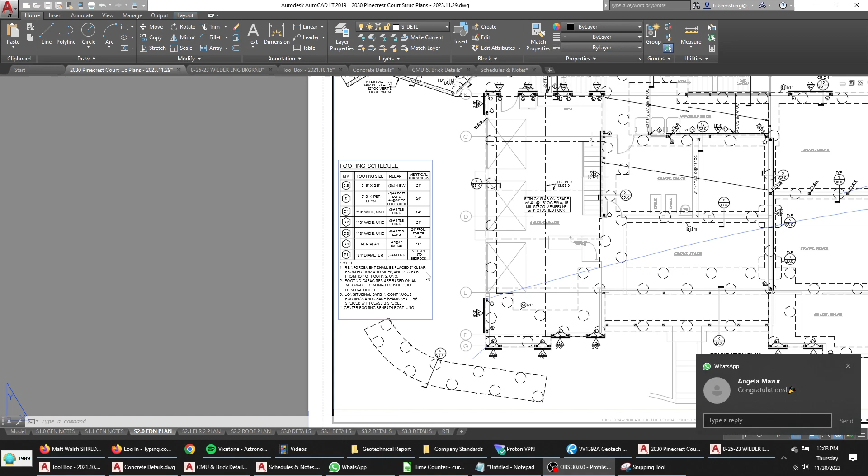Let's draw the footing step detail. Just a reminder, there is where the house footing is. It ends at this line. The retaining wall footing is over here in this area, and it's stepped down. It is stepped down to allow soil to sit on top so that plants can grow, like that.

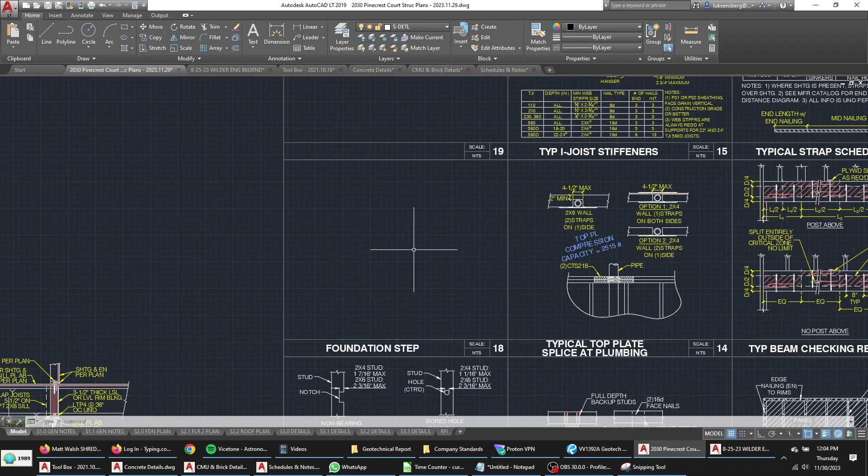So 18 on 3-1 was the detail. Let's see which way the detail's looking. Okay, it's going to have the house, the thicker house foundation on the left. Oh, I was going to see if there's a minimum thickness in the geotech report.

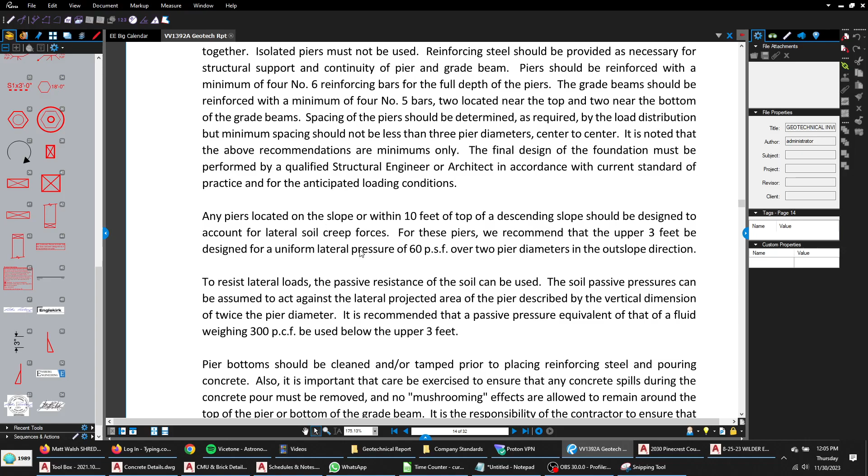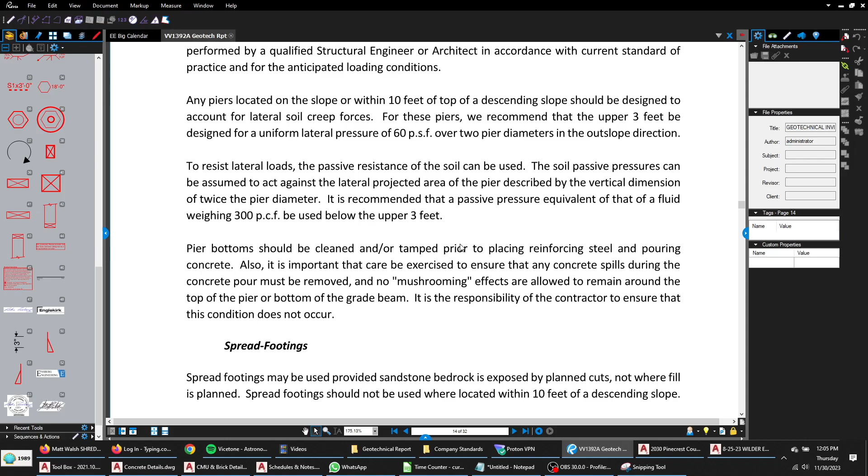Grade beams should be reinforced with blah, blah, blah. The final design of the foundation must be performed by a qualified structural engineer. Okay, that's me. I don't see a minimum thickness for the footings.

Then how big should the grade beams be? Well, they have to be at least as wide as the tops of the piers, and they have to be big enough that a cage of bars can be bent and fit inside of them. I think what's going to happen with this project is that I'm going to downsize these footings, these piers, to 18 inches.

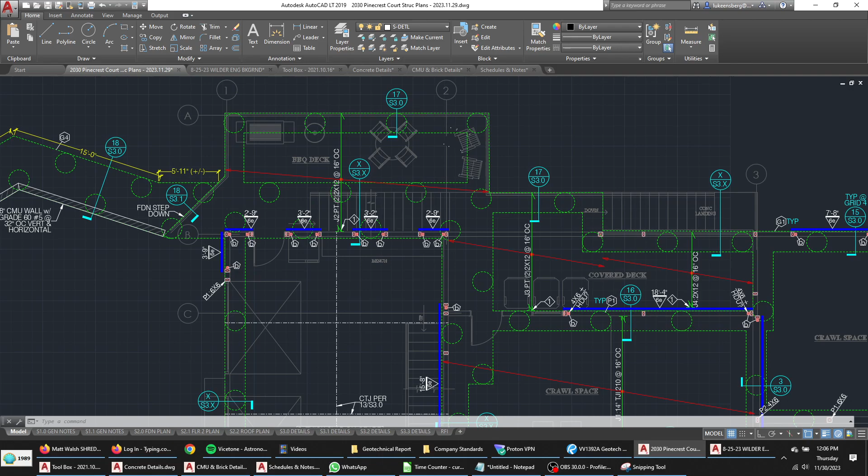Well, let's proceed with the detail for now. I'll have to do a foundation design. I may be getting a little bit ahead of myself, detailing this before I have a proper foundation design done. But let's go ahead with the CAD drawing example, even if I have to come back and adjust the detail. Whatever, the show must go on.

So, on the left side was the high foundation. My guess is that this is actually going to end up being 18 inches thick. So that means the high and the low foundation will be 18 inches thick. So we do like this. Sorry, slow down.

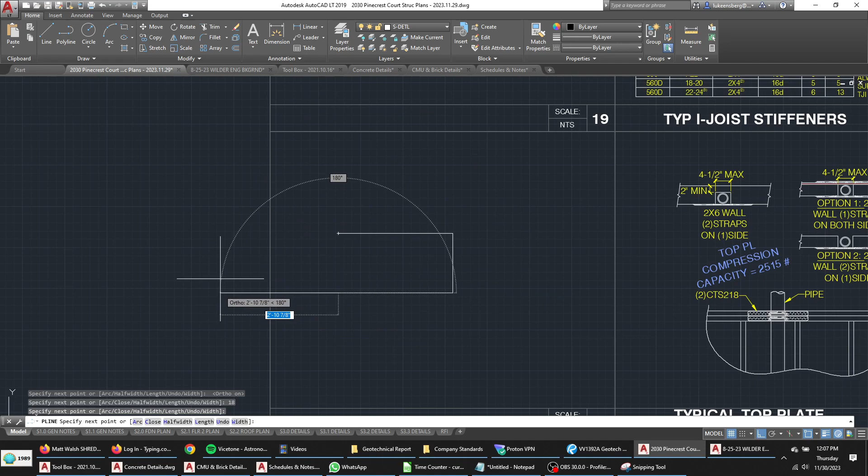PL for polyline. And I just start here, and I want right angle lines, so I tap F8 for ortho mode. Draw some arbitrary distance, click, and now I want to come down by the thickness of the footing, 18 inches. 18, enter. Right, so the program gave me an 18-inch long piece of line, and then I just come back some arbitrary distance like that. And now I'm done for now with that footing. So I just hit escape, and that lets the program know to not draw any more of the polyline.

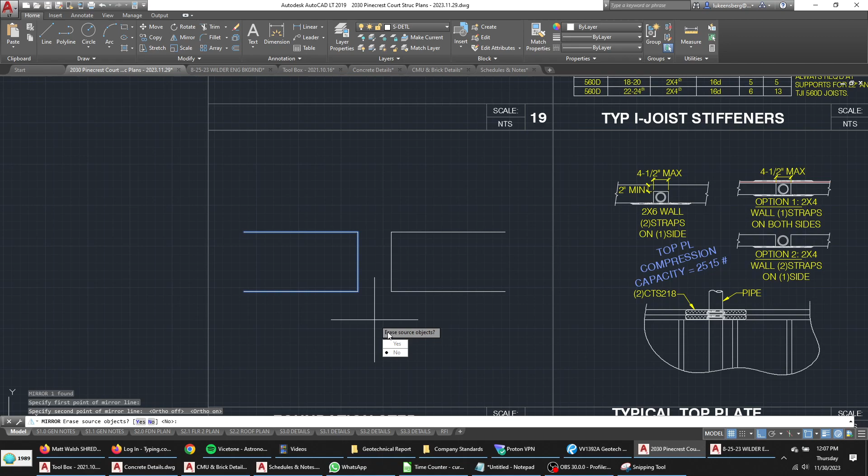Now the other footing that meets up with it is going to be similar, so I highlight this, I type MI for mirror, enter. I have to draw a line to mirror about. So I'll just draw like this, here and here. See the dashed line; if I turn off ortho, I can mirror about any line that I draw. But I'm going to use ortho, and I'll do it like this, click. And then erase source object, no, I don't want it to delete the original, so no, okay.

Now I've got the two footing edges, and we know that they butt up against each other, and I do want them to be connected. So, I also know from this detail that I'm leaving a 1'6" vertical distance from the top of the soil down to the top of the retaining wall footing.

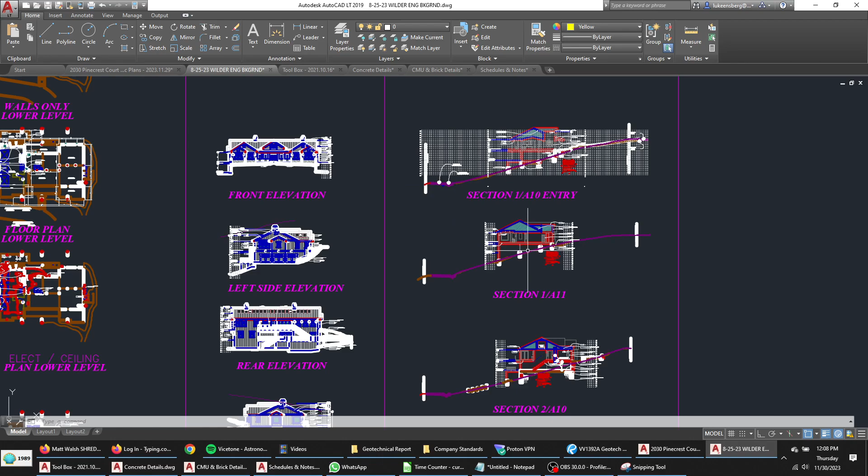And let's look at the house footing elevation by looking at the architectural plan. Look at a section through here, 2 on A10. That section is cutting through the house in about the same area that I'm querying. And what do I see? That's the deck. We're not talking about that. We're talking about this footing right here. This is the one that we're going to be connecting to our retaining wall footing.

And so I noticed that the bottom of this footing is... let's do this. I draw this like a rectangle representing this footing, right? And I draw a line right there. And where the line crosses the footing, that's where the grade line, this purple line, intersects the footing, okay?

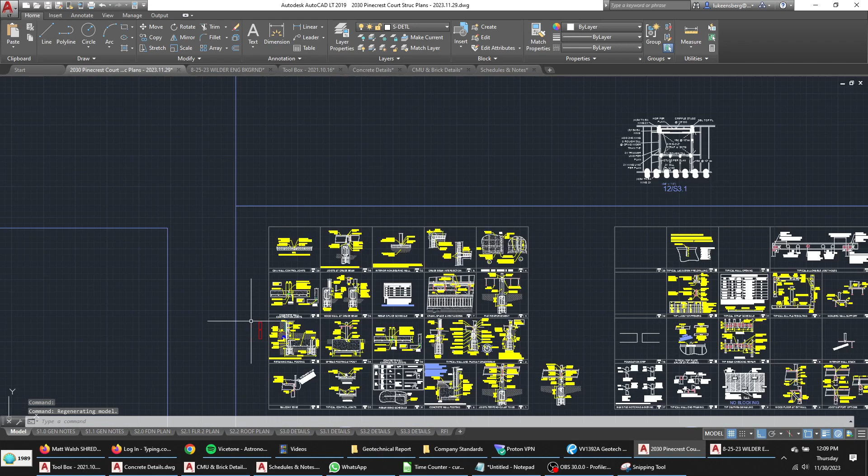So let's take this. I'm going to copy and paste this and take it over to my detail over here. I know this is kind of tricky to follow, but this is showing me the house footing. Did he draw that 24 inches thick? He did. Okay, that was his assumption. I'm the engineer, so maybe I don't agree the footing needs to be 24 inches thick.

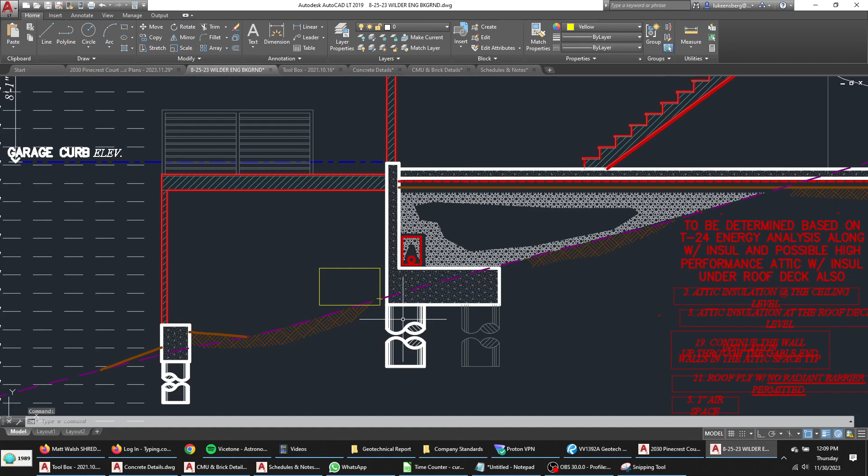So, oh, here we go. Here's the thing to do. So there's the grade level where it meets the house foundation. Let's explode this. I think the house foundation is actually going to be 18 inches thick. So what I did, sorry, I keep flying through stuff, I highlighted this rectangle and I typed X for explode. I hit enter and that blows the rectangle up into 4 separate lines.

I then highlight this, O for offset, 18 inches, right? And now I delete this. This is showing me where the grade line will be. Remember, it was right about this level relative to the bottom of my 18-inch deep house footing.

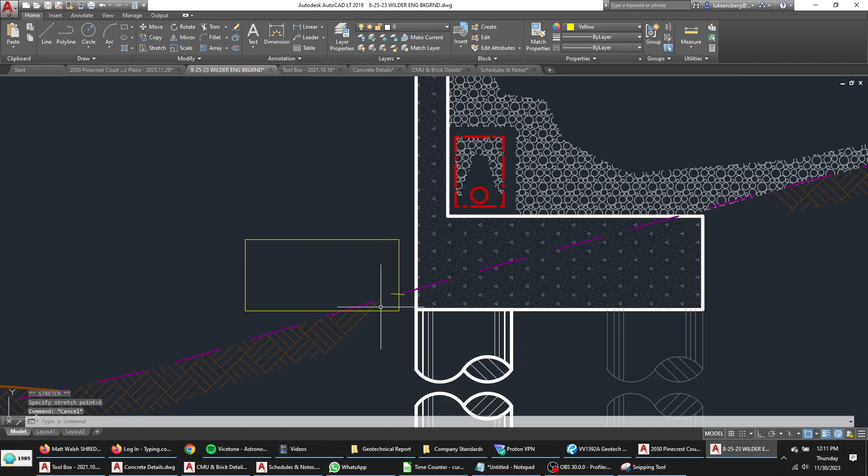So this is indicating that the soil, if the soil is ever below the bottom of the footing, that means the footing is getting undermined. So I think what will happen is, it'll be more like this. The 18 inches will be down like that. Let's copy and paste that.

All right, so there's the 18-inch footing. I'll just verify that by measuring it. 1 foot 6 and 5/16. That's not 1 foot 6. Drawing a polyline, and I'm specifying the length as 18 inches, which is 1 foot 6. I hit enter, and then enter again, and it shows me the depth of the footing.

So I'm going to highlight this, and O-snap is helping me to grab the control point on this midpoint of the footing and pull it up to the end of the 18-inch long line. And I delete the drawing aid. Now let's measure again. Okay, 18-inch thick, right? It said 1 foot 6, which is 18 inches. And then it shows the grade line.

Again, I know this is hard to follow, but watch this. I take this up here, this drawing aid that I'm using, and I place it right there. So what this is now showing is the elevation of the house footing, and it's showing the elevation of my retaining wall footing, which is down here. Okay, that's a significant difference.

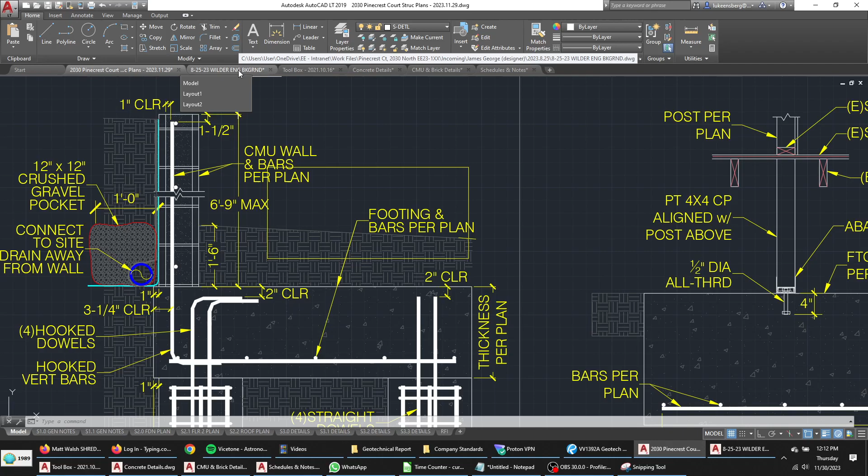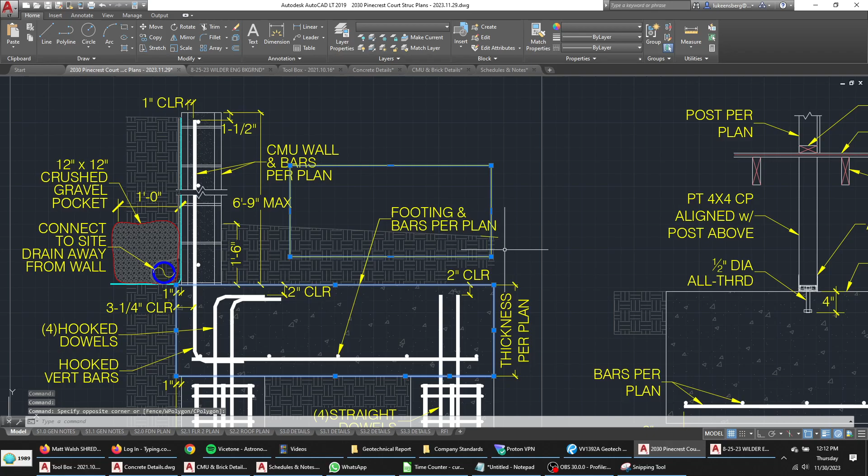And what it reflects is the fact that I have pushed the retaining wall footing down to allow there to be soil on top of it so that plants could be planted here. Okay, and then I'm going to copy this. This is just the reckoning we have to do sometimes to draw the geometries of things. Sometimes it takes some very deliberate thought. Okay, I will copy and paste these things over here. Let's go back and clean this junk out of my drawing.

Okay. So this is the relative height difference of the two footings. And there's the grade level. Okay, the lower footing is the retaining wall. So I'm going to take this over near detail 18. If this feels overwhelming, don't worry. Most drafting does not take quite this much reckoning. So I remember that the left-hand footing of this image was the house footing, right, which is higher. So what I can do is I can inclusive select.

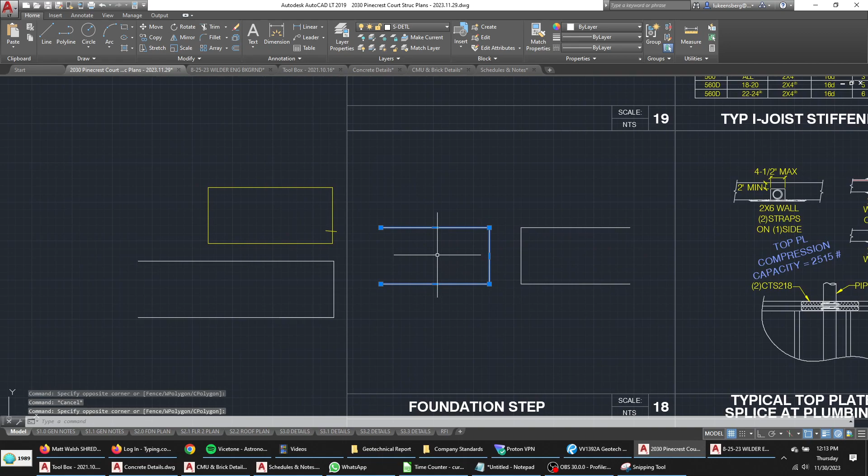I have O-snap on with F3. I move this. I typed here, M for move, enter. I grab that end and I move it over here and I lock it to the house footing image. And then I grab this one, highlight, M for move, grab the corner, and I bring it over here. So what I've just done is I've copied the relative elevations of these two footings, okay? And now I type M for move, enter, and bring them over here into the detail.

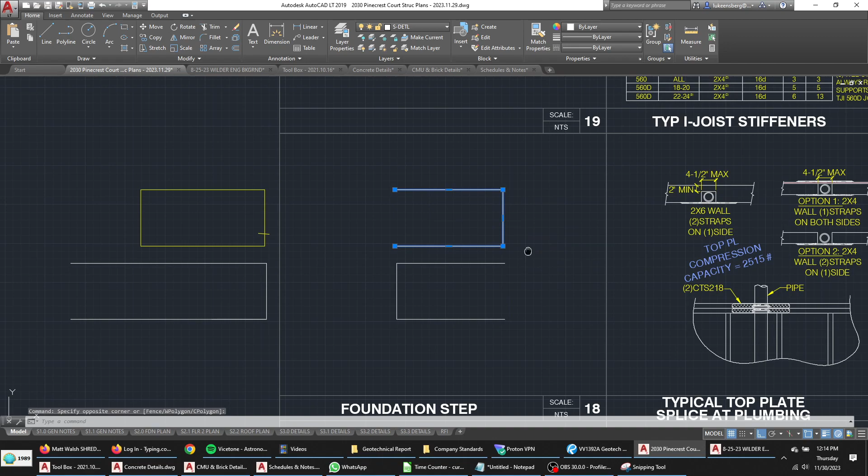These two footings are now at the right elevations. They're not in the right place relative to each other, okay? Where they really need to be is butted up against each other, like that. Now what I've just done is imprecise. See, they're not totally aligned with it. They're not butted up. See how they overlap?

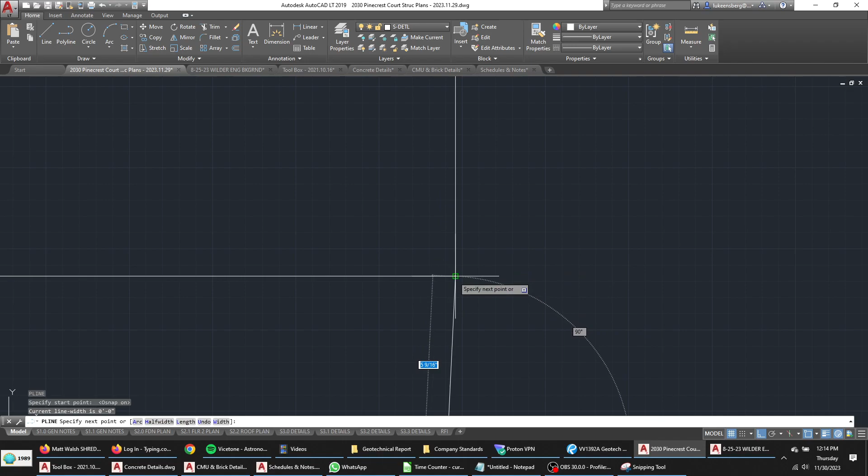So what I'm going to do is I'm going to draw a polyline, PL, right? PL, polyline. And I'm going to draw this line up. And I want to turn off O-snap so this kind of twitchy stuff doesn't happen. O-snap off. And I just stop that line like that. And now I highlight this. O-snap needs to be back on. And I type M for move, and I grab this corner and move it over here. So now these things are horizontally aligned with each other, and vertically their elevations are correct based on the analysis that I did earlier. That goes over there.

Did you see right there how O-snap twitched around, right? I had it on, I'm just trying to move these things out of the way, and it's trying to snap to the edge of this line right here, and I don't want that, right? See how it twitches like that? That's why we turn off O-snap when we're not using it.

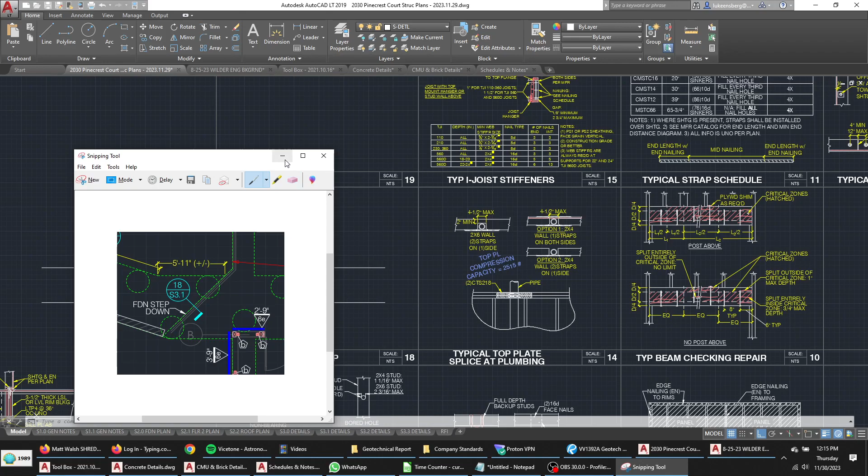Okay, so back to my image here. We've got the house footing and then the retaining wall footing, which is lower, and we need to make a step so that the two parts of the footing are connected to each other. I'm going to extend the footing lines out, EX for extend, and then I'll highlight this as my extension boundary, EX to extend. All right, and now we need to figure out some structurally sensical way to connect these two.

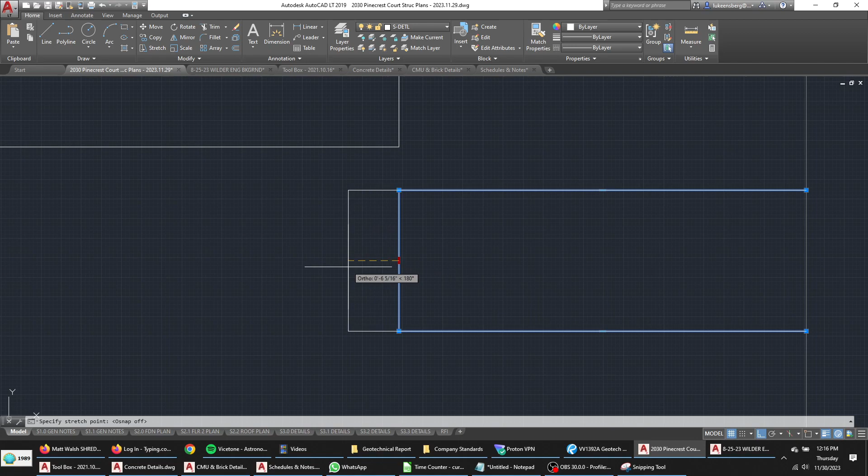What we could do is, I think we should do this. Let's extend this footing over to the left about 18 inches. All right, so I'm going to do this. I highlight it. I grab the middle control handle right there. That blue bump is the middle control handle. I grab it, click. Notice I have ortho on. Okay. And then I've grabbed it, I've indicated to AutoCAD I want to move it in this direction, and I want to move it 18 inches, so I type 18, enter.

Okay, now watch this, polyline, enter to make another polyline, right, like that, trim, right, trim, right, great. So now these two, I've got this connected, okay.

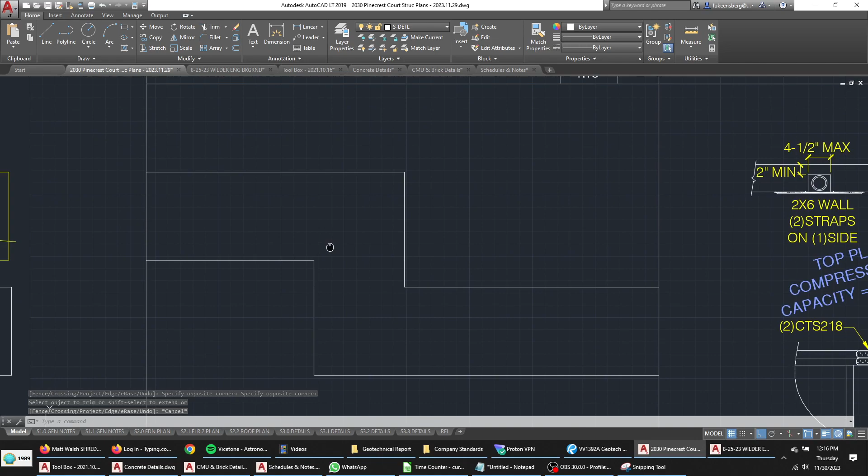What the contractor may do is they tend to pour the concrete in chunks. So what's going to happen is they'll have this and this, and then there's going to be what's called a cold joint. I'm using spline now to draw a rough, like a roughened concrete edge that represents the control joint. This is where the contractor will probably do one concrete pour.

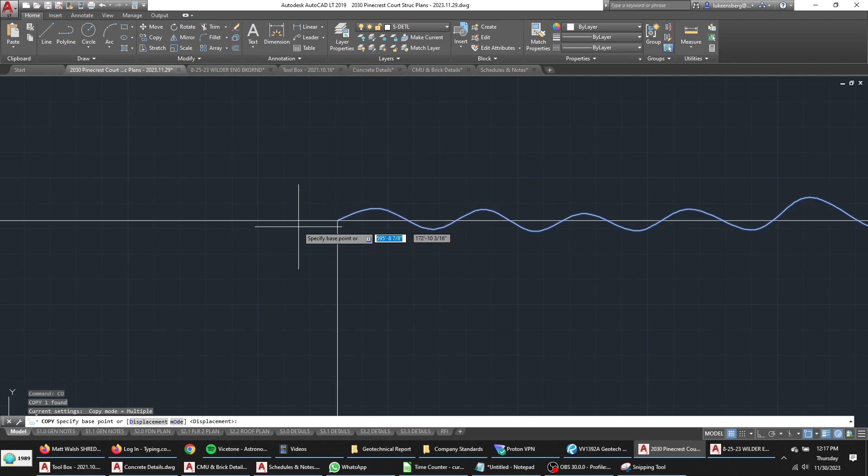Did you notice how I popped on O-snap real fast there and then popped it off? Right, and I'm going to copy this with CO, and I want to grab that corner, right? Boom, bring that down. These are control joints. Now I delete the guideline, and what we can see here is just, oops, trim, TR, enter, there, okay.

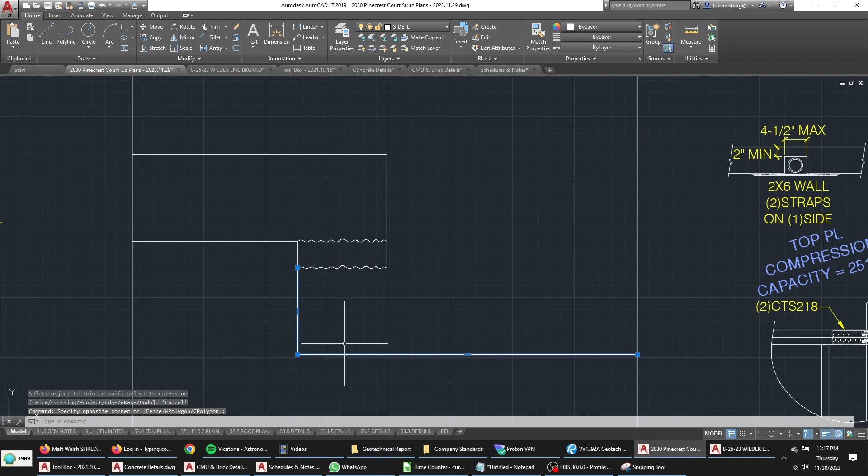Polyline, O-snap. Over here like this. There's my footing. Okay, good. So these are control joints. The contractor's probably going to pour the footing. He'll probably only have one control joint. So he'll pour this bottom part first.

There will be like a roughened surface here, where the concrete just naturally forms in some kind of rough shape. That patch of concrete will dry, and then later the contractor will come and do another pour, I think, and pour the second concrete on top of the retaining wall footing.

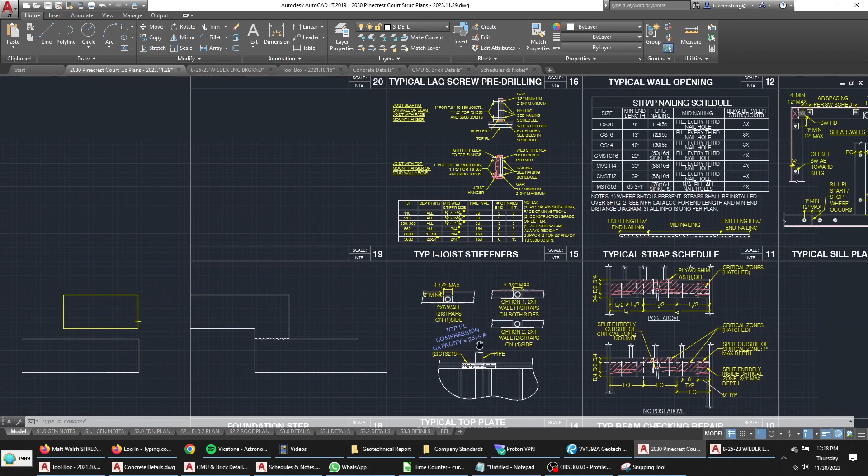I'll put my break line here. I like the little lightning bolt in the break line to be centered between these two lines. Right? I would not have my break line be down here. I want that to be centered. And then I highlight this, TR for trim. I'm using that as the trim edge, and then I cut the footing off beyond that.

Highlight this, Control C, Control V. Right, place that, TR for trim, cut like that. So recenter the detail, highlight it, M for move, enter, click. See, I want to maybe move it down a little bit, but ortho is on. It's not letting me move it diagonally. So F8 to turn that off, and now I can position the detail freely.

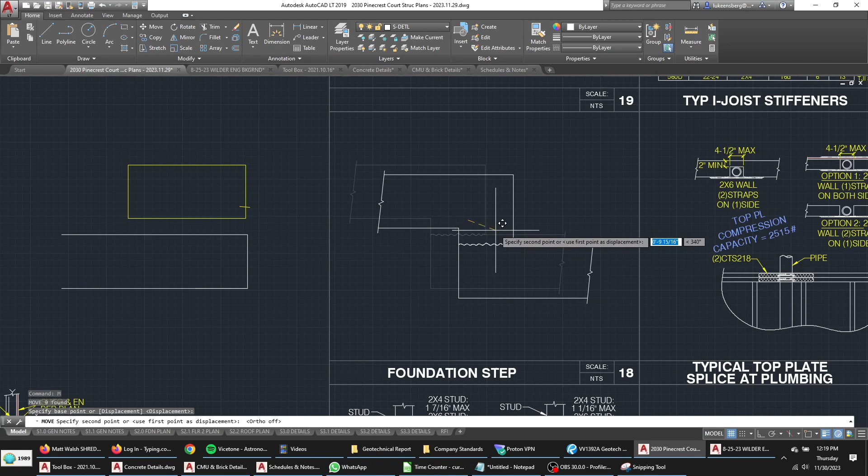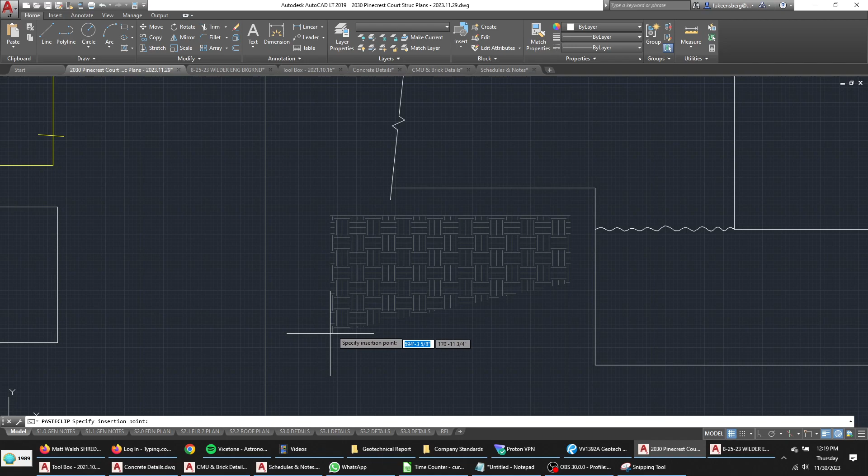Click to drop it. This has been a bit of work. Let's save this. Should have saved a few minutes ago, actually. All right, so now we need the soil. Right, because we know that underneath retaining walls, underneath foundations, is soil. We put the soil, we don't need this top of soil surface, because that's just going to be the same as the bottom of the footing. The line for the bottom of the footing will define the top of the soil.

Right, and let's bring this in here. And I want to do that, right? See, now the soil is intruding into the footing. So what I'm going to do is undo, Control Z, highlight this, and grab this handle, and now I'm going to use ortho, F8. See, now no matter where I slide it, the soil pattern is not intruding into the footing. Okay, and we'll bring this down like that.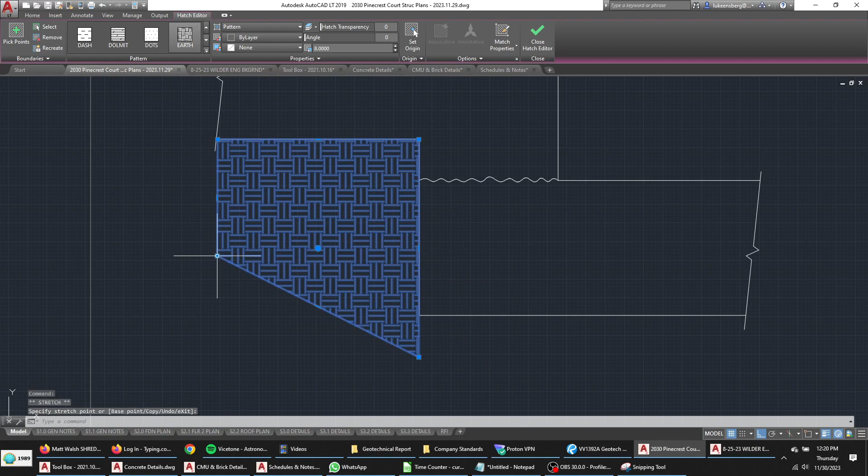I can stretch up there, and then we need to add a vertex, right? But that adds the vertex in the wrong place. I want to draw the soil going under this. So how about up here? I'm just hovering the mouse over this control point. That's it. I'm not clicking anything. Just hover it. AutoCAD senses I want to do something, so it offers me options.

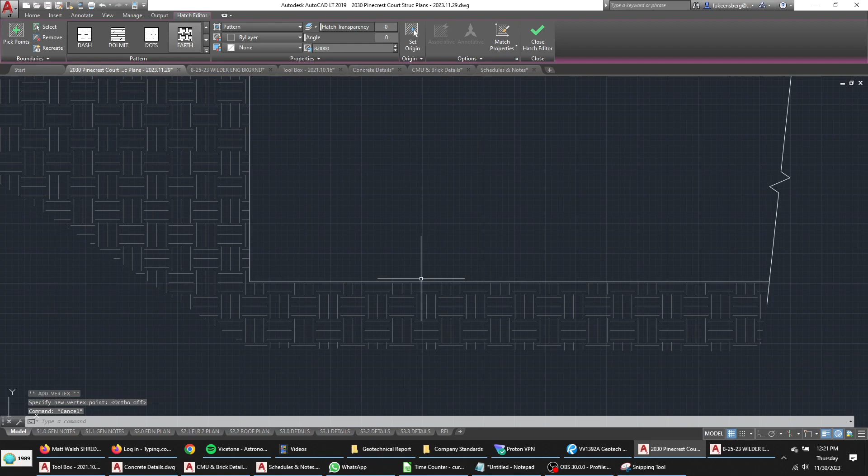Add vertex. Place a vertex down here. Same process. Add vertex. I place a vertex over here. Again, add vertex. Oops. Control Z. Right. Hover this. Add vertex. Just like that. Right, so now I've made it clear that these things are sitting on soil.

Okay, now we can do a concrete fill, because these are foundations. So I clicked up here on the fill, or the hatch. Hatch fills an enclosed area with a hatch pattern. So hatch, click in the area to be hatched. AutoCAD's thinking, it's got to figure out what area I'm talking about. There we go, it figured it out. Now I click on that, and I need to change this to AR concrete.

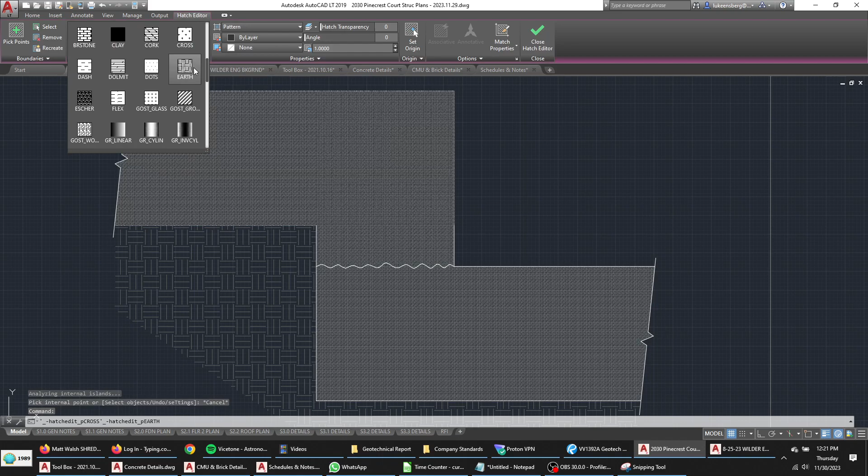Like that. Good. Okay, let's save this work. Cool, looking good. Now, both of these footings are going to have rebar in them. So we can go over here and grab some bars. Copy, paste. Somewhere like, it's going to look something like that, with this being trimmed off. TR for trim, highlight this, delete it, right?

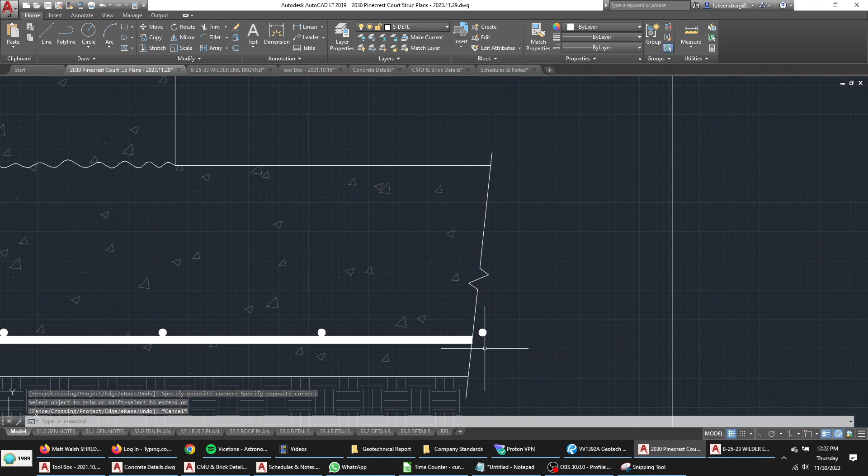We're gonna have some bars in the footings like that, right? And down here too. TR for trim, shave that off, highlight that, delete it, right? So now we've got bars in the footings. Notice that the concrete hatch is on top of the rebar. We don't want to indicate concrete and rebar literally in the same spot, because where the rebar go, the concrete will not. So I'm going to click on this hatch.

If I click just in empty space here, I don't get the hatch, right? I have to click on a line that belongs to the hatch, and then that selects the hatch. I will now right click anywhere and select Draw Order, Send to Back. Now it looks like that didn't do anything, but in fact it did send the concrete pattern behind the rebar. I type regen, R-E-G-E-N, to tell the drawing to reload. Rethink this, enter. Get the order right, there you go. Now the concrete is hiding behind the bars.

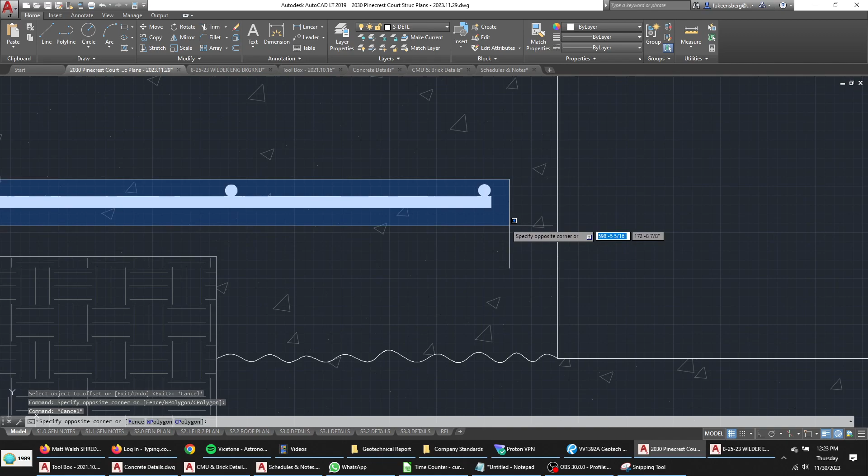Okay. Also, footing rebar have to have 3-inch clear cover. They need to be protected by 3 inches of concrete so they don't rust due to moisture in the soil. So what I do is I click on this footing line and I type O for offset, enter, 3 inches is the offset distance. And you can see that that line offset this much. There's the line. It went into the footing, into the rebar. So I'll hold shift and select to deselect, right? If you hold shift and then you select something, it deselects it.

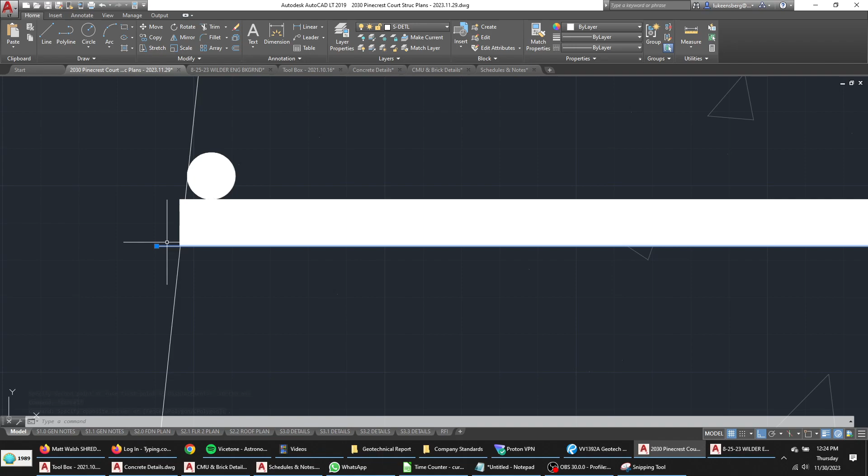And now with M, I'll move this up. Let's use ortho so I don't mess up the positioning I already have of this. I just want to move this up so that now that line, which is 3 inches off the bottom of the footing, is flush, right? It's up against the bottom of the rebar. So now I know if I measure the distance from the bottom of the bar, not the center, the bottom of the bar, to the bottom of the footing, it's 3 inches.

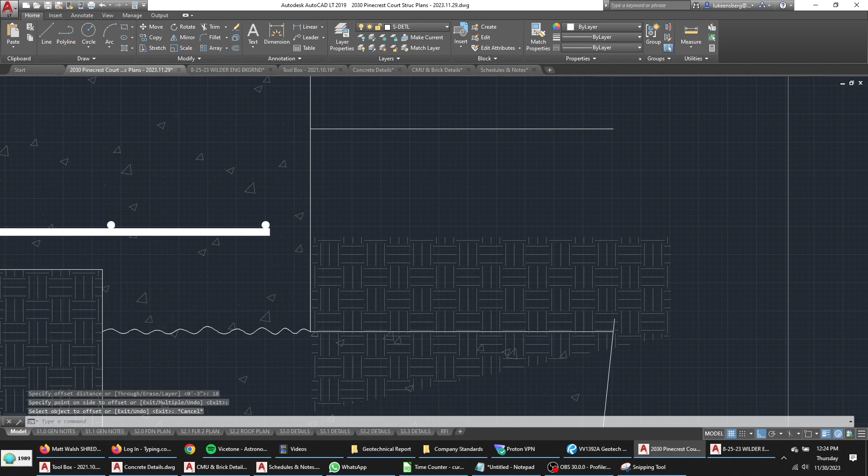Will there be soil here? Yes, in fact, because I said that that was to be a planter. Here, let's get a neater soil bit from a nearby detail. Copy, paste, and then there was to be 18 inches of soil there. Okay, so I grabbed that line, the top of the footing, offset, 18, enter, and this is now showing me what 18 inches above that footing looks like, because that's how much soil I wanted on top of it for planting. I'm going to adjust these lines so that they're not in the footing.

Right, and then I can delete that. That's just a drawing line. Control Z, let's put it back. Now we do have a top of soil surface that is not defined by anything like the bottom of the footing. So let's leave that line there and change that to layer S pattern 251 so it can be gray like the soil fill. Right, so now we're showing the footings.

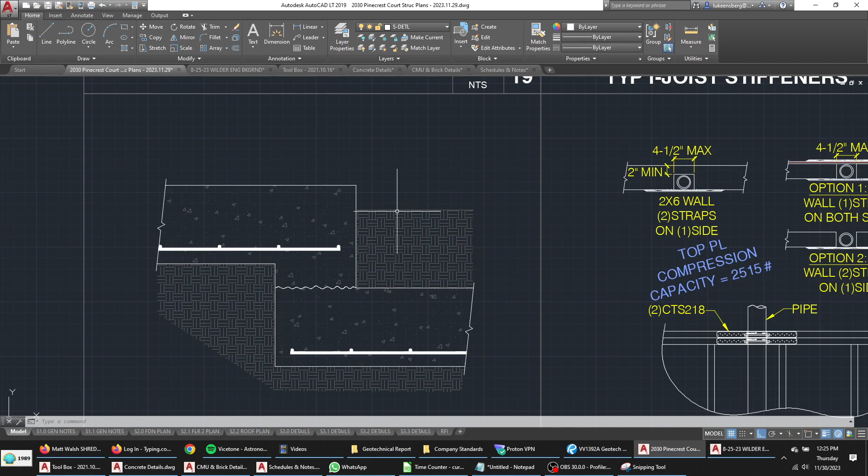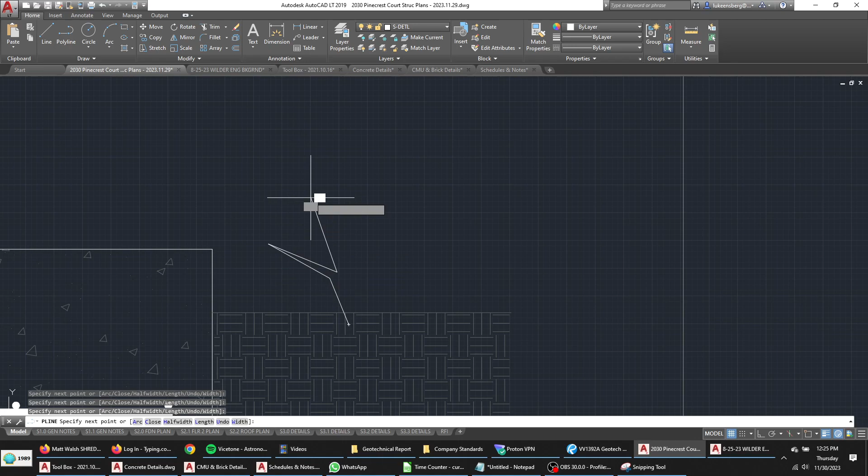And by the way, this is an elevation, okay, which means down is that way. Down is like this. The center of the earth is down there. Okay. Plants would grow like this. Right, like that. And then a root ball that I'm not going to draw. So there would be a hypothetical plant. Anyway, we don't need that.

Go away. Okay, we need to do the same process, make sure that this bar has 3-inch clear cover to the bottom. And I'm going to do a slightly different process this way to show you an alternative way to do this. I'm going to draw a square, REC for rectangle. I start a first corner point here, click. And I'm going to tell it the first side I want to be 3 inches. Now I hit the tab key, and I want the other orthogonal side to be 3 inches, 3 and 3, enter.

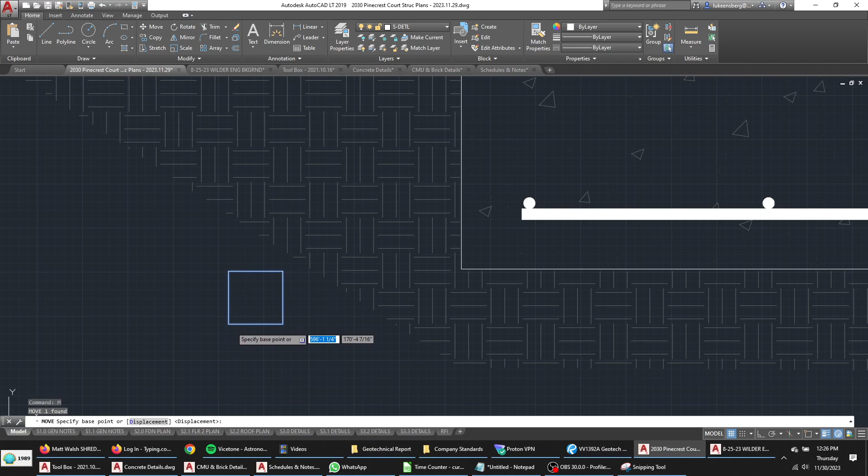And now I can grab this, M for move. See it's not snapping to a corner, I need O snap on, F3 O snap, and now I move this here. See, I wasn't too far off of 3 inches, but this square is showing me a distance of 3 inches clear from the bottom of the footing. It's also showing me 3 inches clear to the soil on the side of the footing, right? So I can highlight this bar now, type M, enter, and move this and set it right there, 3 inches from the side, 3 inches from the bottom. And then I have to go trim it over here, or EX for extend over there.

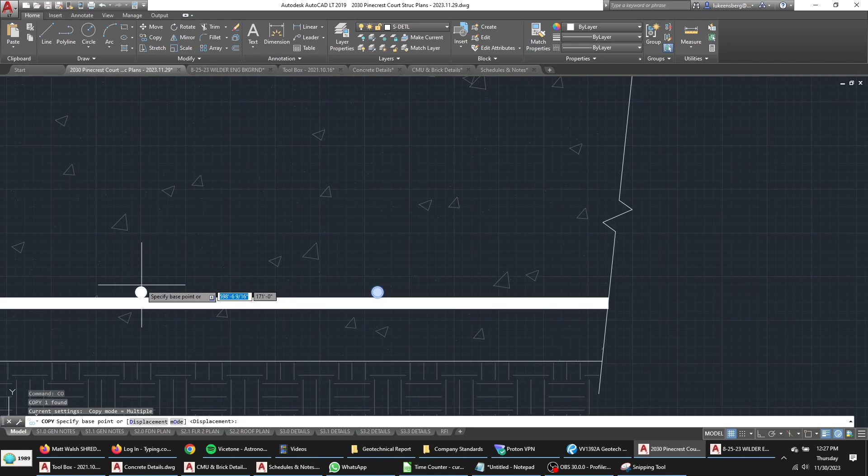Should there be another bar right here? Let's see. Highlight this, copy, select base point in line with this bar, and then I don't want to do this, right? So we use ortho. I move this over to mimic the spacing, right? It's going to be even spacing. So I'm showing go same distance over like this.

And what we see is that the bar is a bit off. It's kind of off the break line. So I'll just hit escape and leave that alone. I'm not going to draw a bar that's out of the break line.

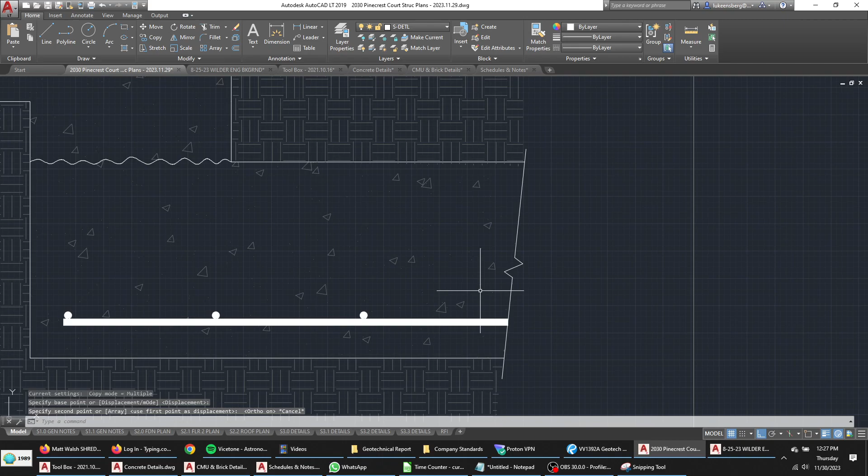All right, and let's check this 3 inches. O for offset, enter, 3 inches in. Not quite 3 inches. Okay, so let's do this. Highlight this bar and the attached bars, M for move, and then move it over like that. And then delete the drawing guide. Okay?

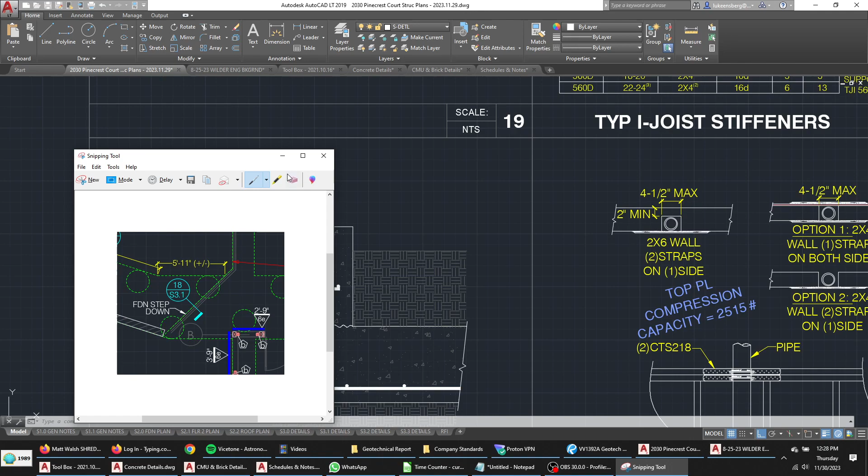Now let's take a look at the image of the plan. Okay? Here is the house footing and the lower retaining wall footing. I have not drawn any vertical bars tying these two things together. Maybe it's not necessary. Maybe the piles will hold them together.

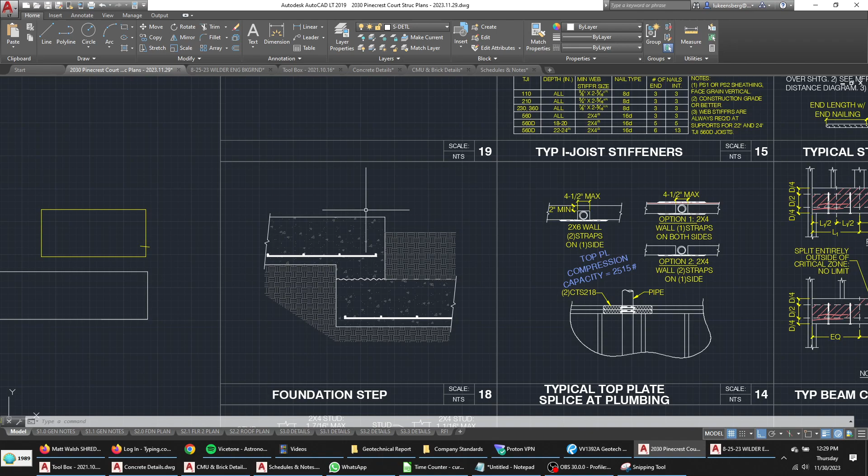Let's look here, we can see a pile that is like on the edge, right? So what we need to do is go and we need to draw that. Now, where is that edge? That line that I had just indicated, that diagonal line, is actually this line. Explode this. That line is this line.

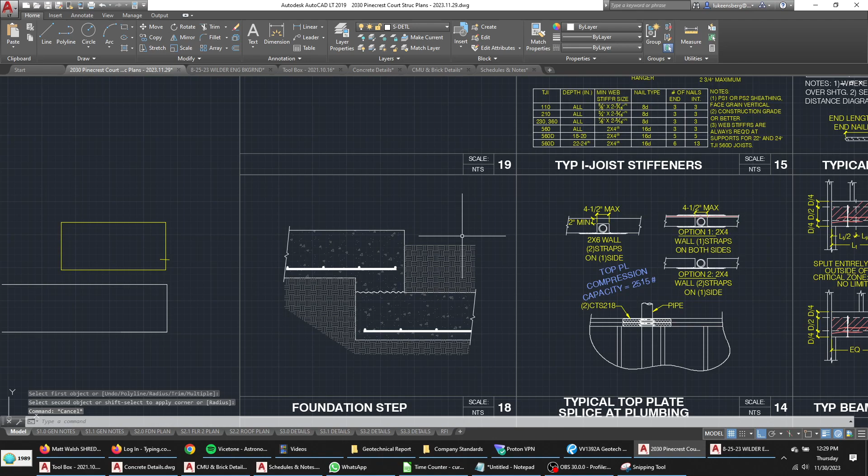So rejoin these. So fillet, 0 radius. I'm not trying to make a curve. F, enter for fillet. This line joins to this line. Okay. So that line is what was on plan. And then we have another line now that's 18 inches offset. So let's go draw that on the plan, right?

I'm going to click on this and type O, enter, offset. And it needs to go, was it to the left? Yeah, it was to the left, like that. Okay, let's trim that off. Trim is not working because the foundation is part of a block. So I'll just manually move this.

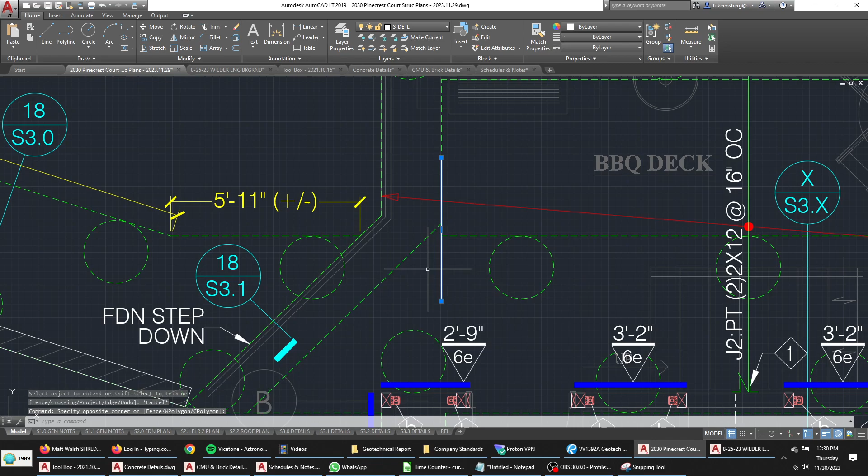Use O-snap right there, right? And then this, can extend work? No. Okay, I'll draw a temporary guideline right there, right? Oops, come on, ortho. O-snap overpowered ortho right there. I don't know if you have quick enough eyes to see that. There, okay. Guideline, extend to there. Delete the guideline, boom. All right, and then we'll bring our footing call out further out.

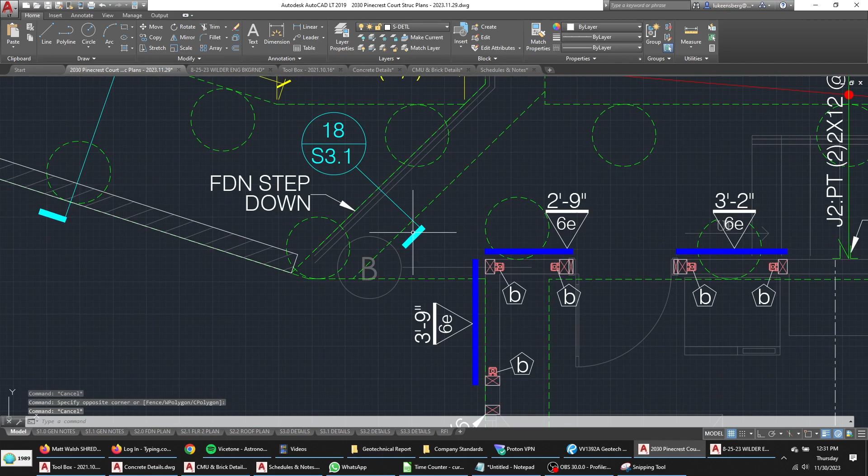Okay, now see how this significantly overshoots that line? Watch what happens when I go look at this on plan. See how it's sticking out on the back like that? It's not neat, right? So I'm going to move that a little bit so that the symbol looks like this, just like a clean L. That's how it should look.

So what I did is I extended my detail call out to include that whole step right there. From this line to this line, let's go over to 18 on 3-1, is from this line to this line, okay? And now I need some bars. I go into tools, I'll just say number 5 bars. This is the engineer talking, right? I'll grab that, it's got a 90-degree hook in it.

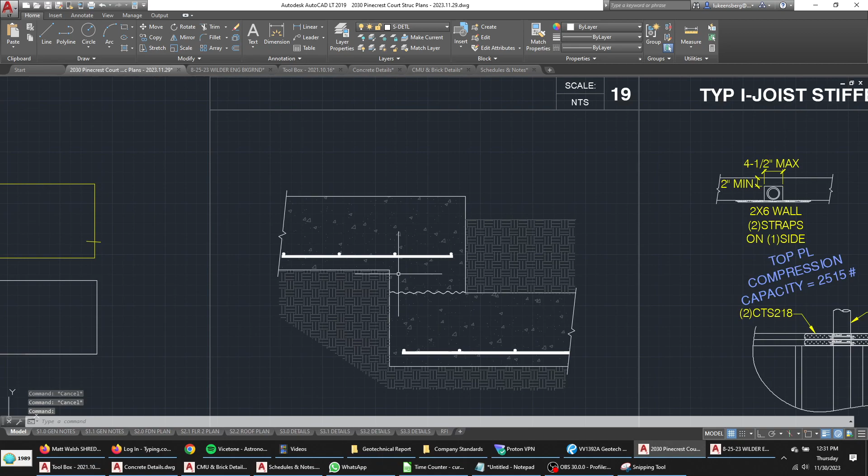Okay, I'll rotate it. I want to rotate it 90 degrees. So I could type -90 to go clockwise, and then I move with M. Whoops, what is this? What's happening? Why can't I move it? Right, ortho, turn off ortho. Right, and I want some bar to go like, let's just say like this.

If we're going to put a bar there, we might as well have it come up high on the top of a footing. That's not where the soil is, so it can have 1.5 inches of clear cover. That was the offset command I used to make this line. Now I'm deleting it. I just used it as a drawing guide. I used M for move to move this bar up to that 1.5 inches clear. It's 3 inches clear cover to soil, 1.5 inches clear to atmosphere.

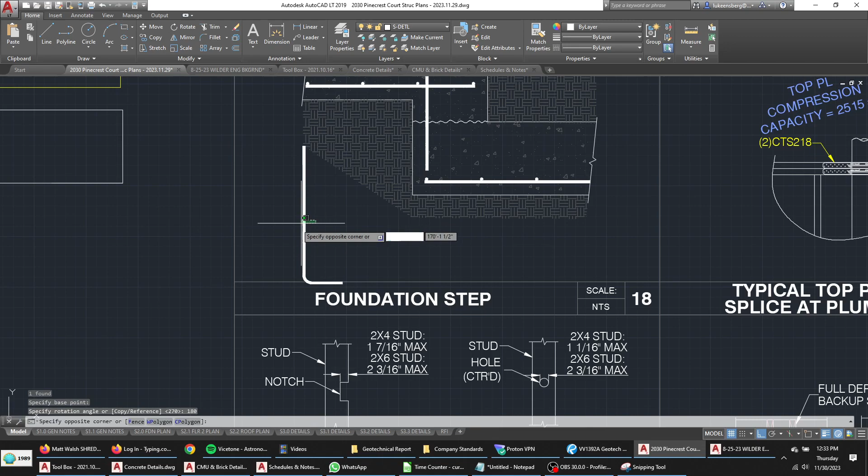And then I want this to come down, and we need the hook so that the bar can anchor. So let's say I turn this 180 degrees. RO, enter, rotate about this place. There, click, and I type 180, enter. Okay, M for move, and I'm going to bring this here and have this hook sitting right there.

Okay, like that. See how these are offset from each other? I'm going to align this. This is probably perfectionism, but I like things to be really cleanly drawn.

Now it looks like one double hooked bar. I'll make a copy of that. Let's make a block so these things don't come apart, so I don't have to deal with them as separate objects. I click Insert, Create Block, and it wants a name here. I just pound the keyboard, hit OK, and it asks where's the insertion base point. It doesn't matter, just click somewhere near the object. Now this thing acts as one object, and I can grab it and move it around.

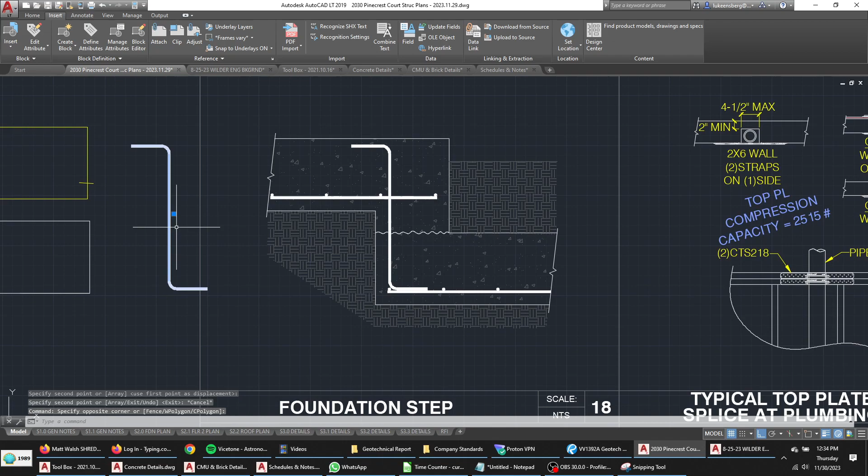So here, that's against soil, so we're going to offset 3 inches. The offset line is there, you just can't see it. If I zoom in, it's right there. So I'm going to bring my bent bar in like that, 3 inches from there to the soil to protect the bar against corrosion. Delete the drawing aid. I accidentally hid one of my bars back there, so let's bring that out so it can be seen.

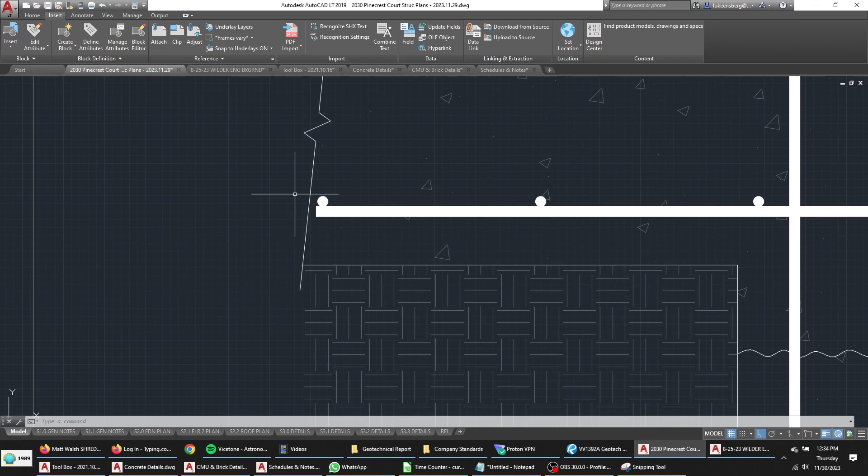Now we've got some bars connecting these two together. Uh-oh, extend this, EX, and also these bars, they're actually going to be top bars too. Offset, let's look at this. Is this a grade beam? I think it is. What is it over here?

This is so locked up by piles, I'm not going to make them put closed ties in. Closed ties are hoops like this, square hula hoops or round hula hoops of rebar that are put into a footing or concrete beam to make it stronger. I do not judge that that is necessary in this case.

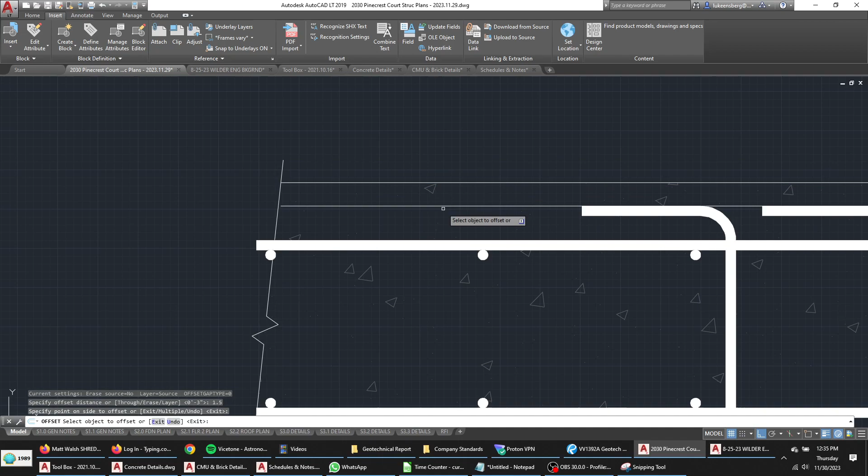Where's my detail? So I won't need those. Do we want top bars in the house footing? Yes, and those top bars need to be 1.5 inches clear. Watch this, I move these bars up to 1.5 inches clear. Now my hooks disappeared somewhat into the bars. I need to fix that because it needs to be really clear to the contractor that there are hooks there.

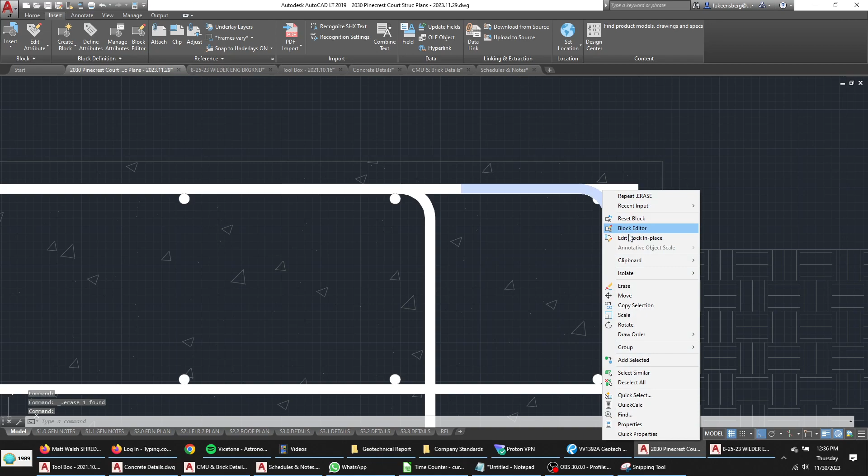So what I'm going to do is right click on this block, edit block in place, and bring this hook down a little bit so the contractor can see that it's there. Then here, this is from the upside down hook, let's bring that down like that so it disappears again. Save changes, okay. And guess what, it changed the other one too.

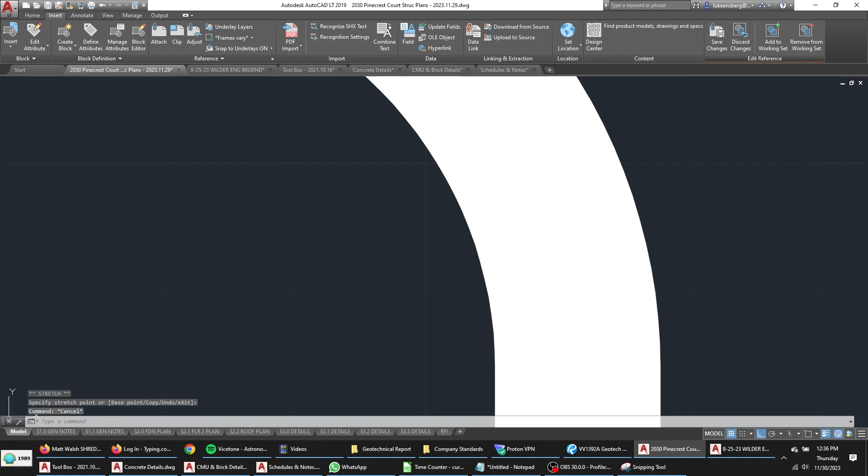But not enough, because this bar is caught inside that one, and in real life bars never overlap. So let's try this again. Edit block in place, bring this down like that, fix that, save changes, pow. I think it's almost time to wrap up this video. There we go, okay, now the hooks are evident again.

We don't need you, you're outside the break line, and trim, TR. Poof, cut that off. Okay, making some progress.

There's soil here. This bar is not up against soil, but it's kind of not far from soil. So let's offset 3 inches and pull this bar back in to 3 inches clear. Delete. Okay, there we go. Now we're making good progress on this footing detail.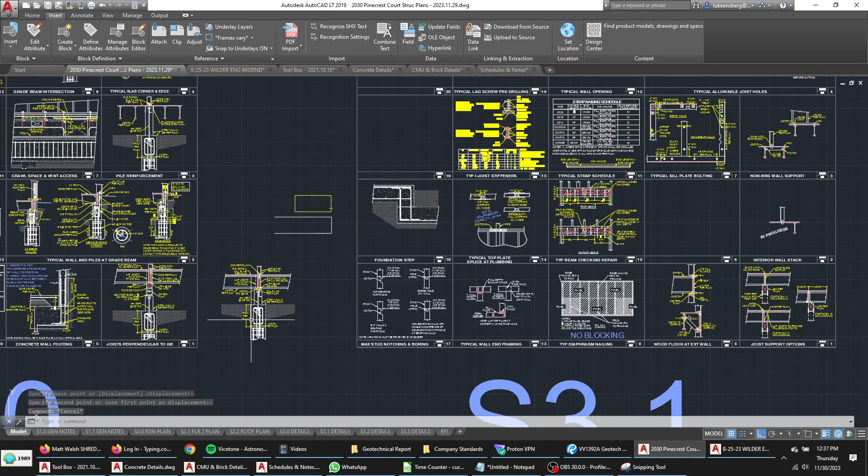The next thing to do will be to copy in the pile, so we'll have to make room for it because it's going to be under here. Let's grab a pile image. Oops, not that. And I grab the dowels that come out of the top of the pile and their hooks.

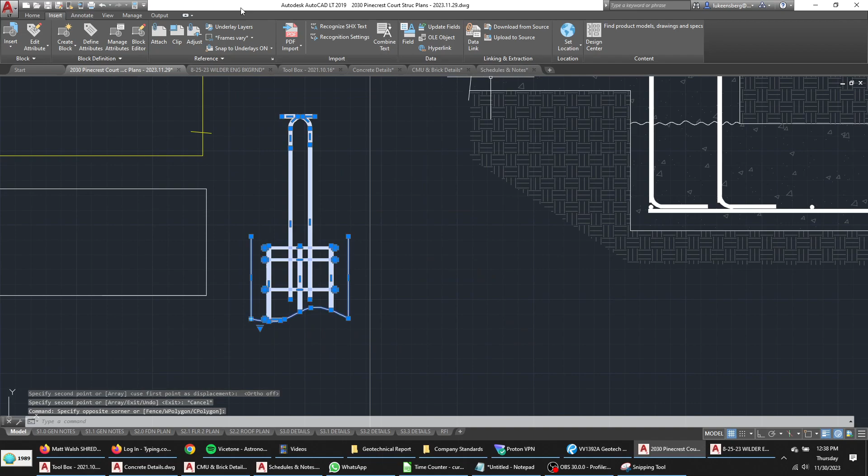CO for copy, enter, click here, anywhere, and then just move it. I'm not moving it, I'm copying it. Now where do we want the pile? What I'm going to do is make this a group. So highlight this, go to Home, click on Group, like that. Now AutoCAD made that into a single object that I can move around easily.

So I don't get the lines of the pile mixed in with the lines of the foundation and then have to pick them apart. Okay, so where would I want the pile? Where would it make sense structurally? Like to be under a thing like this where there's some substance to the concrete underneath to anchor into? Or would it make sense to have the pile be up here?

Or would it make sense to have the pile be halfway across the line, because that's what's currently shown on the plan. What's currently shown on the plan is the pile being halfway across that line like that. Okay, that looks kind of awkward to me. Here's what's on the current plan, see the pile is straddling that line.

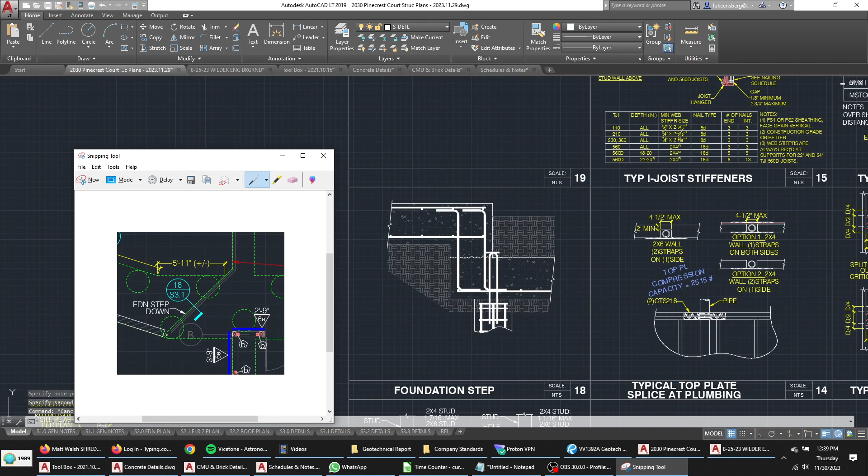I guess we could do that. It seems kind of awkward. I think most engineers would put the pile right there.

Yeah, I think that's how they would do it. Let's neaten this up a little bit. M for move, like that, okay?

So now we need to do some cleanup stuff. We need to get the soil hatch out of there, and we can do that by using trim. I'll turn off group action for right now by clicking this. I'm not ungrouping those things, I'm just turning off the group behavior. This and this, TR for trim, and I trim the soil. Let's try again - trim between these two lines, and I trim the soil hatch out of there.

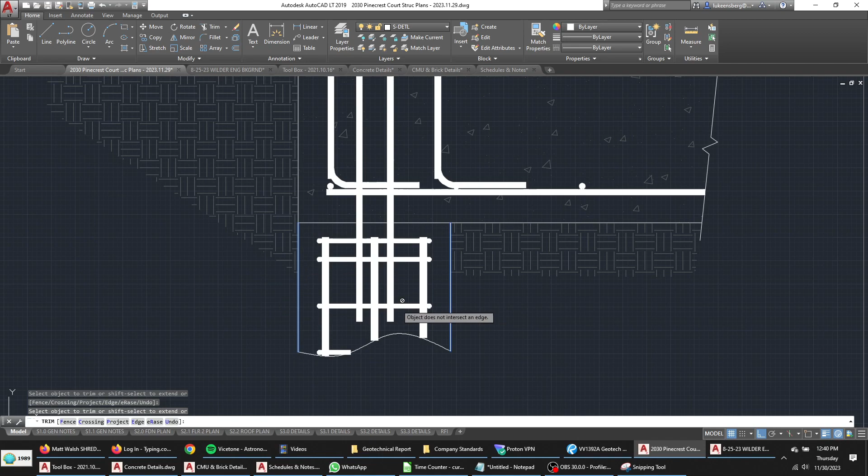Very good. And then I've got my dowels. We're not going to have the dowels come to some arbitrary place like a couple inches above the cold joint, or also called the construction joint. I don't even need that. Let's just have it like this and this.

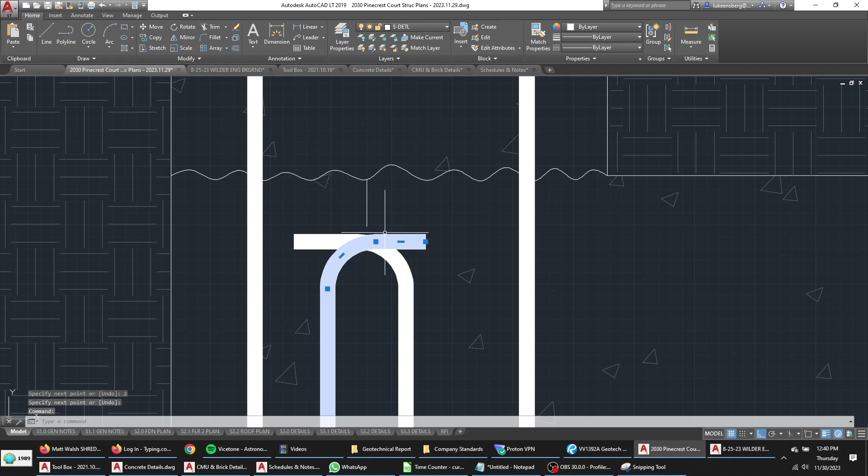All right, and let's bring these hooked bars down to, I'll just say 2 inches below the cold joint. I just drew a polyline 2 inches long to show me where 2 inches was. And I'm going to move these up so they're about 2 inches down from the cold joint, and then I'll delete my drawing aid like that.

Right, and then trim, because those dowels are not going to go below the break line. I mean, they will go below the break line, but we don't draw below the break line. Okay, so there are the dowels.

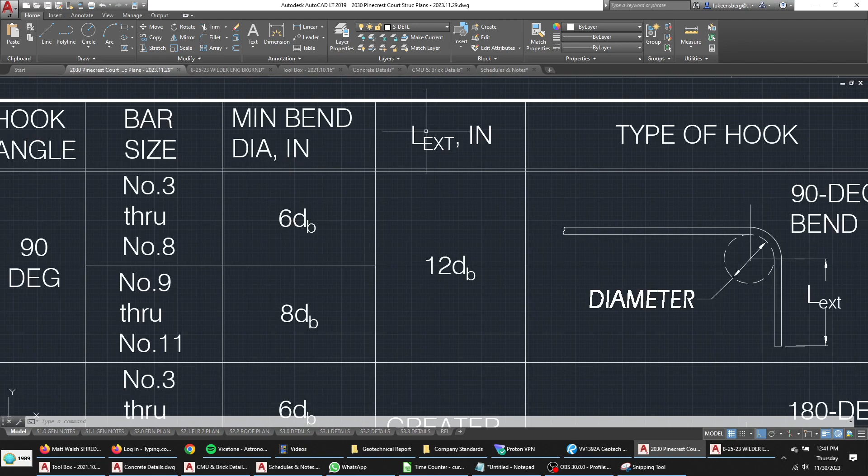The hooks on these dowels are going to be - I go over to my rebar bend schedule. The length of the hook on a 90-degree bend is LEXT, beyond the radius, beyond the curve. LEXT is equal to 12 times the diameter of the bar. Saying these are number 5 bars, what's 12 inches times 5/8? You're right, 7.5.

So we want a 7.5 inch hook beyond the bend. So I can draw a line like that, and then I can use offset. Offset, O, 7.5, enter, and it shows me where 7.5 inches is - it's right there. I don't want the contractor to make these tiny short hooks and then tell me 'you drew it, I didn't make proper full length hooks because you drew short ones, so I just built it like you said.' So this is why I'm going to draw to scale.

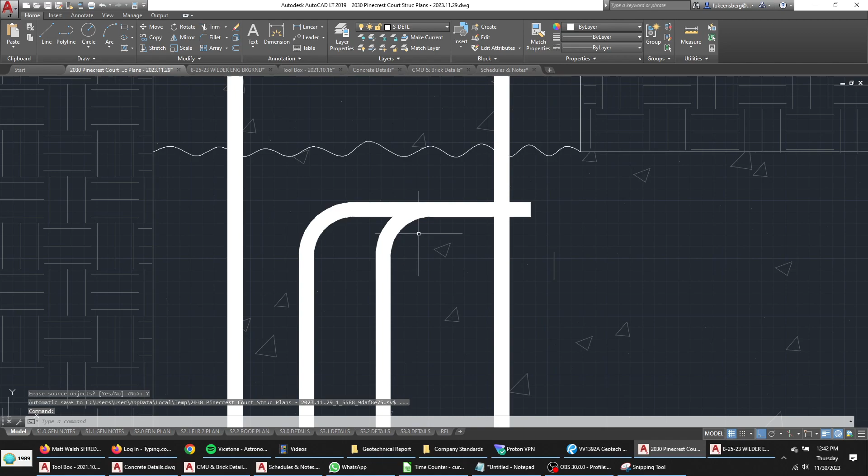And then let's rotate this with mirror. We'll mirror it. Yes, erase the source object. All right, and now this hook is barely visible, so let's bring it down a little bit to make it clear it's there. Right, and then here are these 2 lines that are 7.5 inches apart - put those there, this is just a drawing guide. Stop it. Right, and then extend that out 7.5 inches. So there are the proper hook lengths.

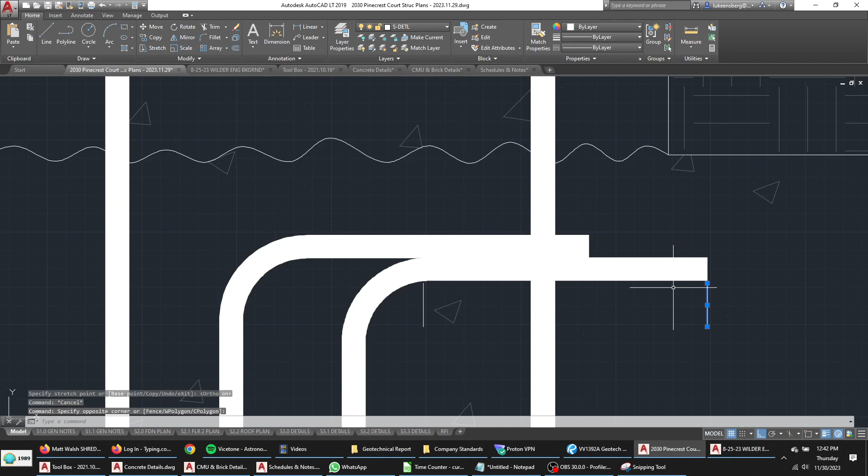Why did I turn this bar around? Because if I hadn't, the hook would be pointing over there to the back of the footing. Maybe not all the way out the back, but it certainly would not have 3 inches of clear cover over the bars, protecting the bars.

Look at this, that's messy. That's not supposed to be there. Move this up, like that. Goodbye. And guess what - when you change one block, all the other copies of that block change, so it's fixed over here. Here we've got bar conflicts, just put this here like that. All right.

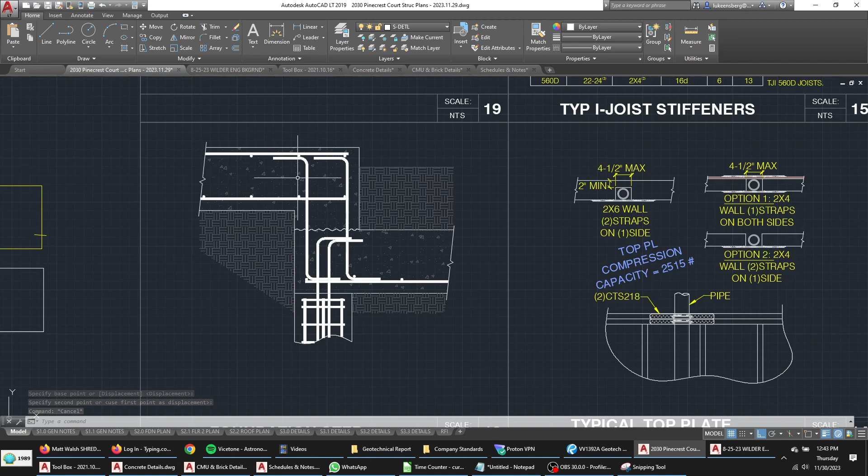So there's more to specify about this. The next thing is to start putting in - well, let's see, did we get all the physical elements drawn? Let's go back and look at the plan. Here, I got a pile there.

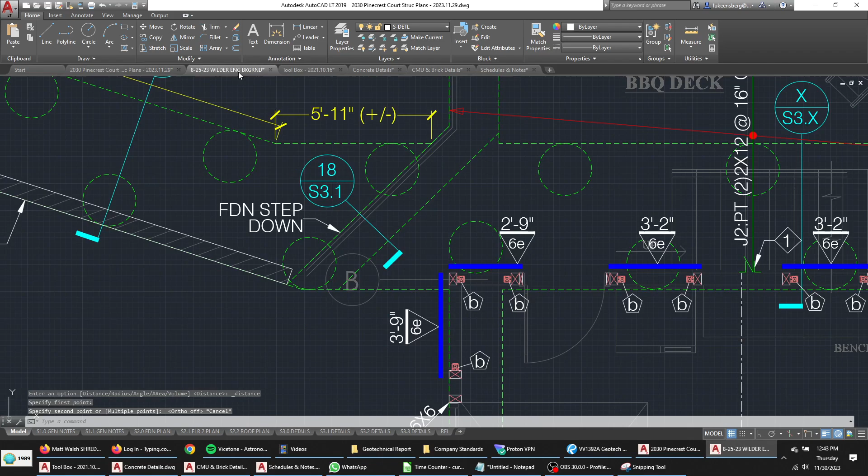It looks like there's some kind of - is this a rail? It looks like there's a balcony, like railing that's going to go there. Okay, and how far off is it - it looks like it's just off from that edge, 1.5 inches away from the edge. Let's go back to this, 18 on 3-1.

Now I'm going to take a little nap, I'm getting tired.

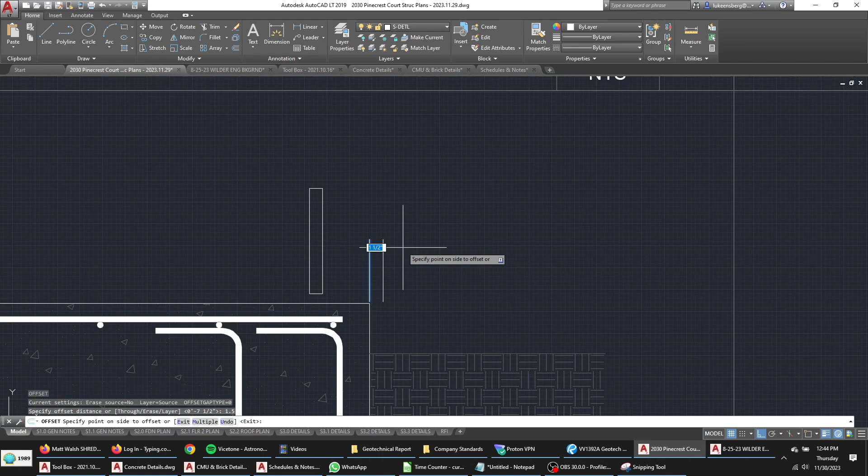We have to just imagine how the guardrail will go. So I'll just draw a rectangle 1.5 inches by 12. I'll put it here, and then it's going to be 1.5 inches off. So I'm drawing just a drawing aid, offset 1.5 inches in. So that's the 1.5 inches from the edge of the footing that I had measured on plan. Delete, right? And so now we're just thinking about how's the guardrail going to work, right?

Is it going to embed in the concrete right there? That's pretty close edge distance, right? So that might be a coordination issue with the architect - what the exact stanchion hole will look like for the balcony, and how the balcony edge will go relative to the edge of the footing. It's a coordination issue.